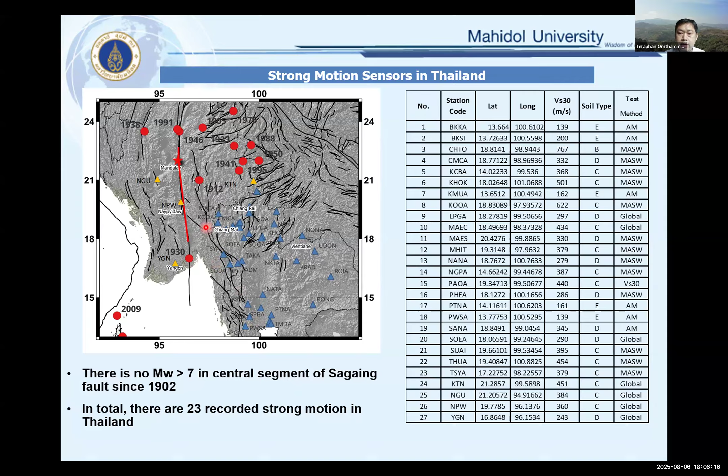Before that, I would like to go back a little bit to the history. This is the 1930 Bago earthquake that was felt intensely in Bangkok, and it was really close to Bangkok compared to the 2025 one. This is the description that people felt, and there were some minor cracks in 6 and 7-story buildings at that time, 95 years ago. The earthquake caused considerable alarm and people ran from their houses into the street. During that time, we didn't have tall buildings, and people could still feel this kind of shaking. So if you compare to MMI, it should be about 5.

There were also observations like an unbraked stationary motor car seen moving. So it's more or less the same as what we observed in March 2025 also. This means that this kind of earthquake happened in the past, and we observed it before, so it's not unusual that we can see it again.

In order to explain that, we need to understand the basin. This picture shows the topsoil in Bangkok. Later on, I'm going to show you some video that we have compiled. The first location is Sukhothai, located in the central part of Thailand. This is the video that we observed.

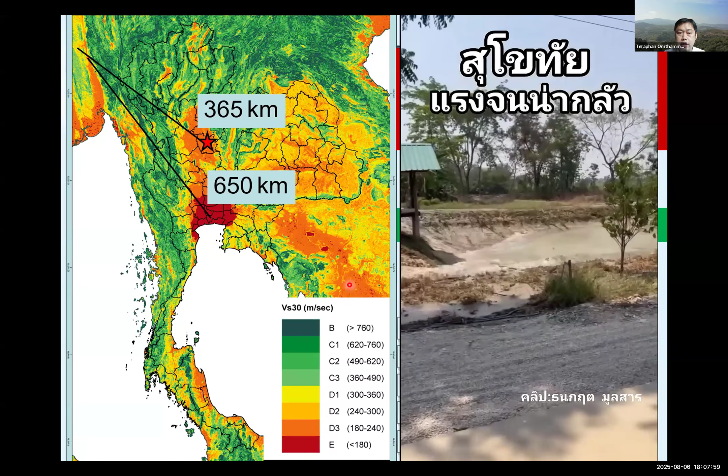This is sloshing of the water in the river. Due to the soft soil, and even though it's quite far away already, we still can observe this sloshing.

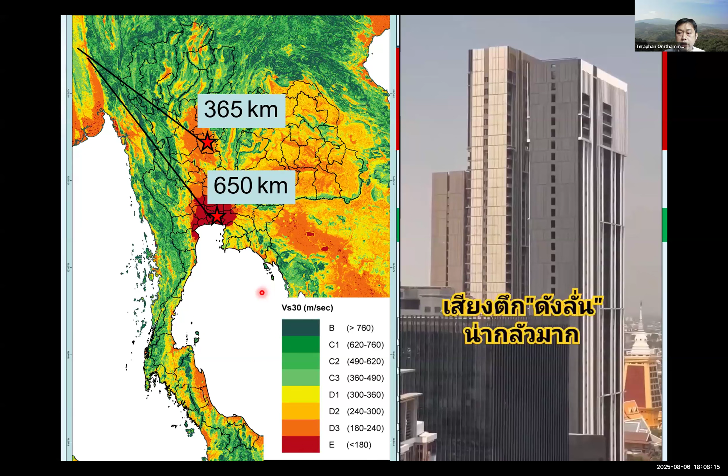Another video is from Bangkok. This is the vibration of a tall building due to the soft soil. So even though we are away from the seismic source, due to the soft soil, these effects can still be seen at about 365 kilometers and 650 kilometers distance.

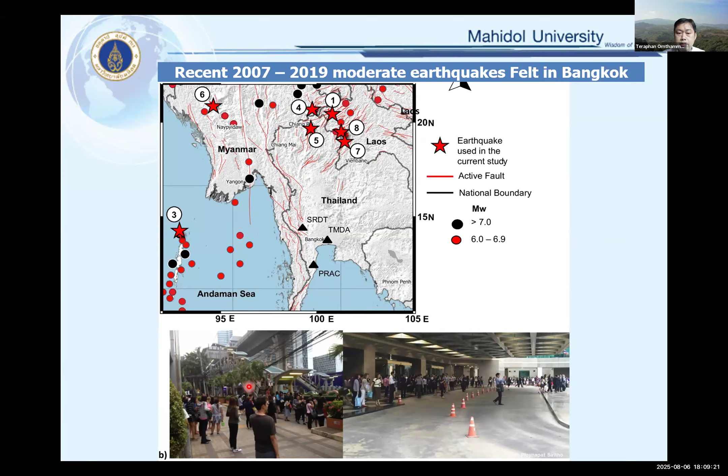Question then: in the past, did we observe this kind of shaking? People in high-rise buildings in Bangkok do feel this kind of vibration, but not like in 2025. This is the picture of people running down from the tall building. Mostly magnitude 6.5 earthquakes in Myanmar, Northern Thailand, Laos, or Andaman would cause shaking in tall buildings, and people would not feel comfortable, so they run down to the street of Bangkok. But the scale of the vibration isn't that large, though there's still a concern, so they run down from the street.

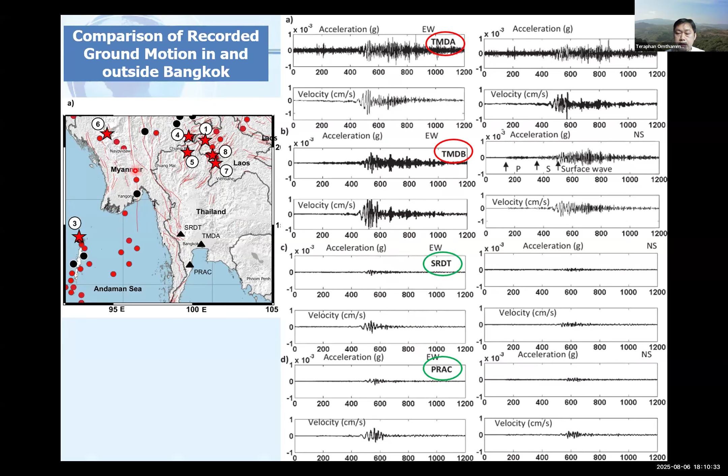We have expected this kind of event for some time, and we always said to people that there is a seismic gap inside Myanmar that we should be prepared for, and engineers should design for this kind of earthquake.

Coming back to the global context, the global seismic hazard map shows that even though in northern western Thailand the seismicity is not that high, we call it a moderate seismic region — for the 475-year return interval it's about 0.2 to 0.3 G on rock site for PGA. But for Bangkok, located away from active faults, the PGA at 475-year interval is lower, about 0.03 G on rock site. But this doesn't cover the soft soil effect, so the value seems quite low.

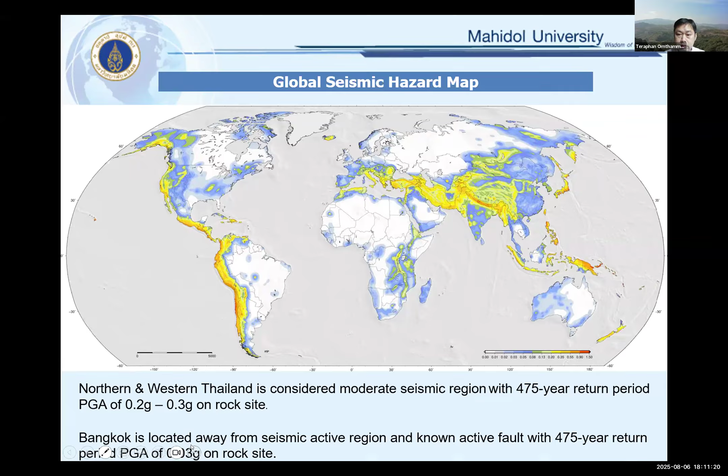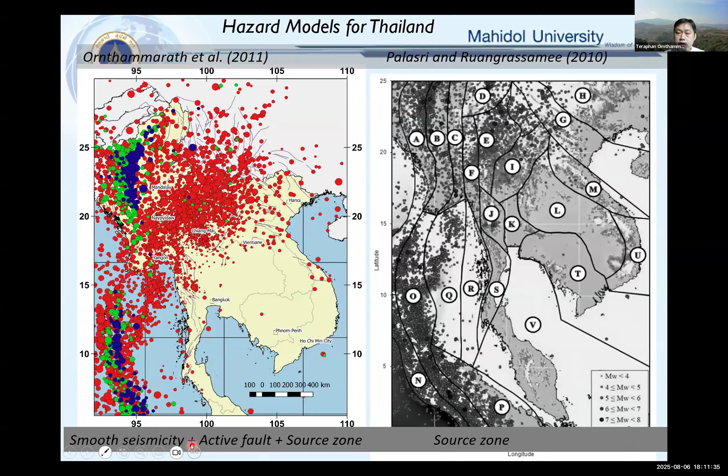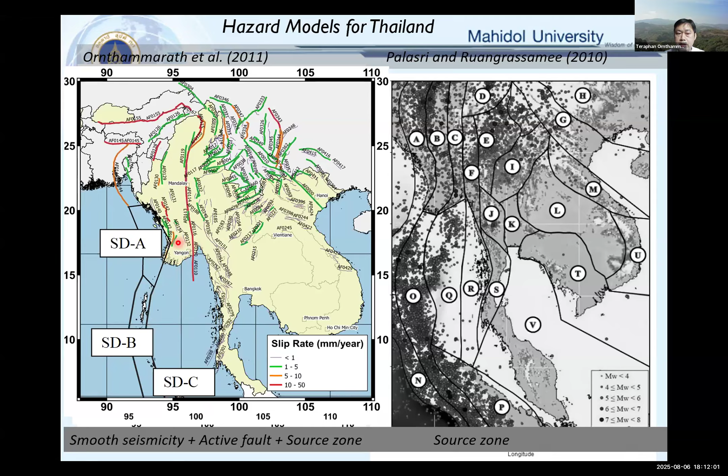In the National Seismic Hazard Model, we use two models, left and right. The left is smooth seismicity with active faults, and the right is active seismic zones. We classify different kinds of earthquakes inside and outside the country, and also consider active faults, as you can see on the left map. The red ones are the faults with high slip rate, which we already consider in our seismic hazard model for Thailand, along with the subduction zone here that has been quiet for some time.

For people that do not know about the seismic design code in Thailand, Dr. Pennung led the development of the seismic design code. We used the model of ASCE 7-05. It was first issued in 2009, and the latest update is in 2018. It is used throughout the country. The required value is the SA for 0.2 and 1 second for 2% probability of exceedance in 50 years. So this one we follow the ASCE as the standard.

For Bangkok itself, like I said, we have a lot of soft soil and the basin. So this is the Bangkok Basin Seismic Design Spectrum. You can see that it's quite unusual in the sense that normally you're going to see the high plateau at about 0.2 to 0.5 seconds, right? But for the Bangkok seismic design spectrum, because of the basin amplification, the peak goes to about 1 second.

So Bangkok is about zone 5, so it's about here, this line. It's quite unusual for the normal seismic design spectrum that the top goes until 1 second and then slowly goes down. So because Bangkok is away from the active fault, but we do have the soft soil, the amplification is going to be at the long structural period.

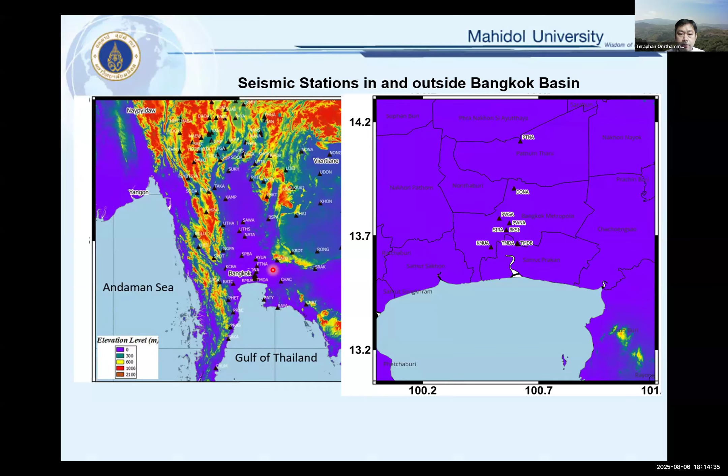And this is the seismic stations in Bangkok. Fortunately we have a lot of seismic stations that were able to record this event, but some stations unfortunately could not record it. Still we got a lot, like 5 stations out of this. And this map shows the elevation level from the ground. You can see that the central part of Bangkok is quite low, because a lot of the topsoil is located here.

So we are still trying to figure out the reason for the observation of the strong ground motion in Thailand, why it is always larger than the 1 sigma high. Maybe one of the things we need to check further is whether there is any directivity effect, because the rupture moved from Mandalay to Naypyidaw, and whether we can see this in the strong motion or not.

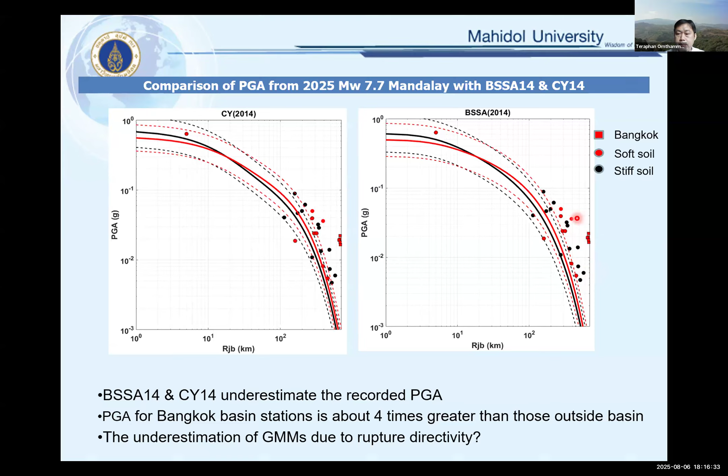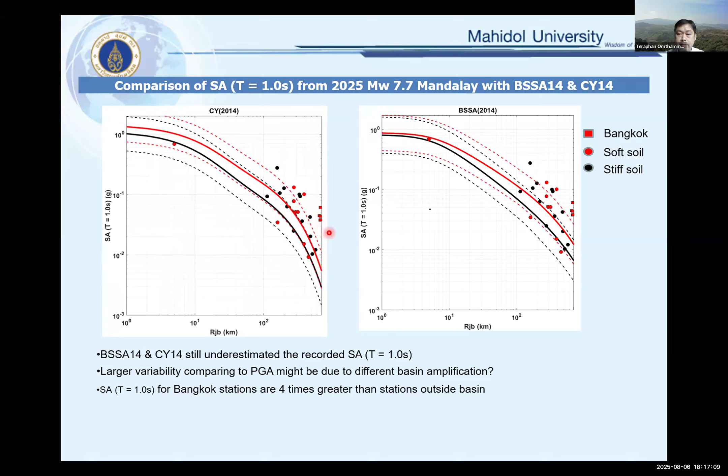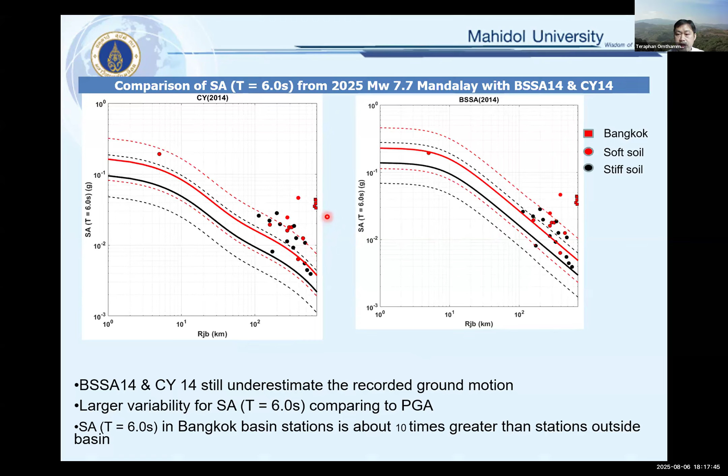When you see the previous figure that I just showed you, you might ask whether Thailand should use NGA-West2. In the past, in 2014, we had a moderate earthquake in northern Thailand, and we also did the same comparison, but we did not see much underestimation of the GMPE compared to the 2025 earthquake.

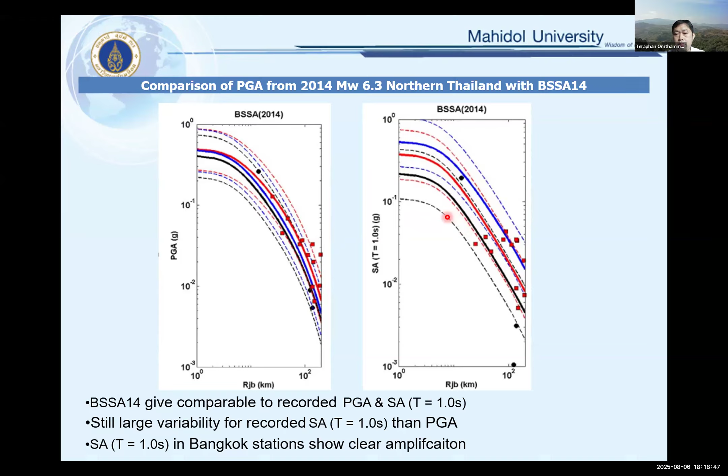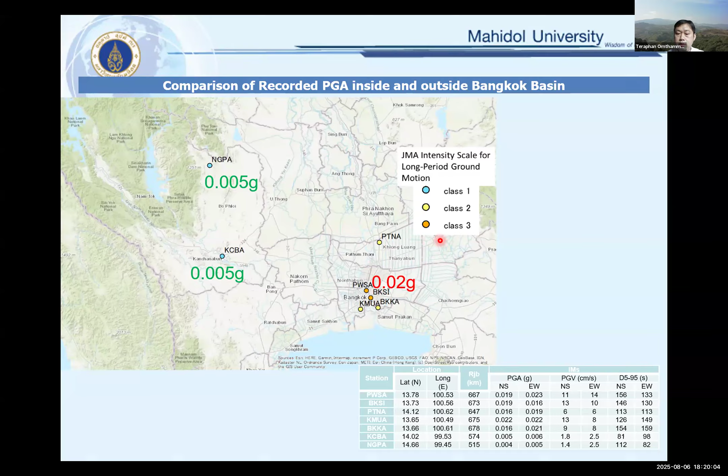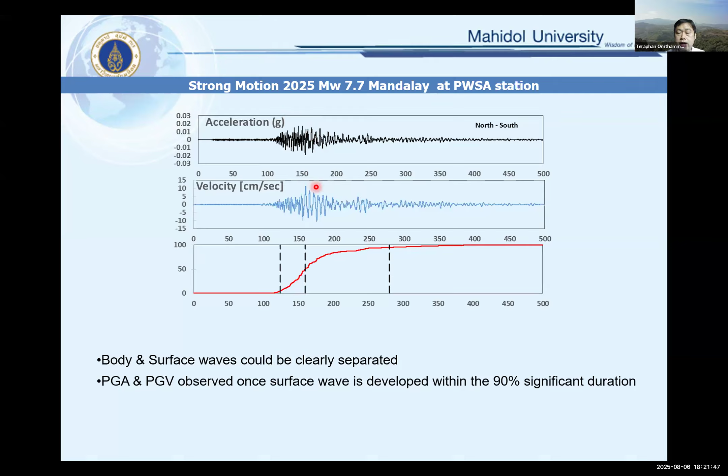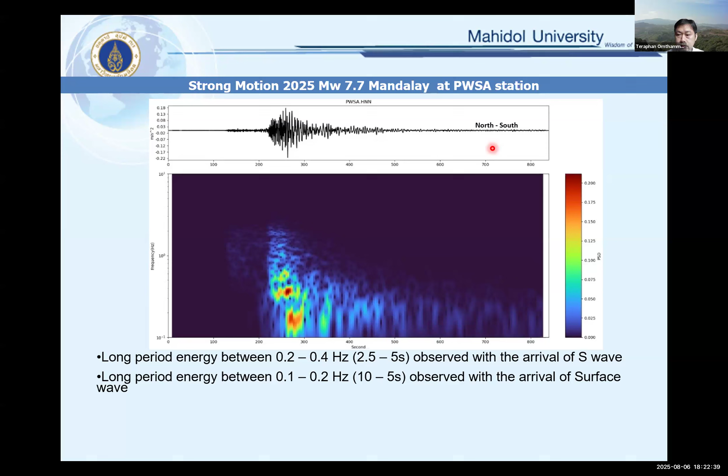If we do the same analysis for all three axes - north-south, east-west, and vertical - we can see that the long period energy is only seen in the horizontal direction, not in the vertical direction. So the surface wave moves quite large only in the horizontal direction, accounting for about 50% of the total energy observed in central Bangkok.

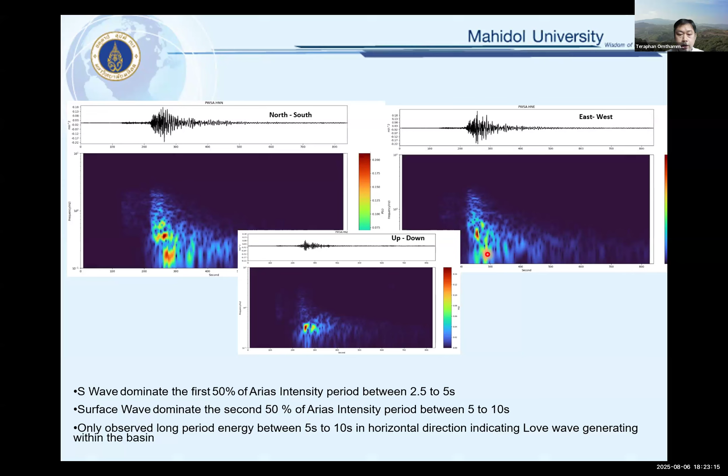If we consider this movement, it might be the Love wave, because the Love wave dominates in horizontal direction movement, whereas the Rayleigh wave would also have a moving pattern in the vertical direction. So that's what we consider might have happened in 2025.

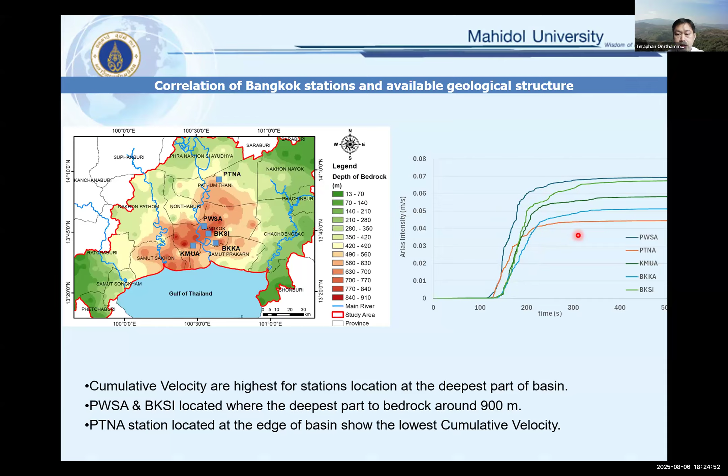From our ambient vibration measurements for tall buildings in Bangkok, for the 2 to 4 second range, that's about 20 to 50 story buildings. If the building has been built properly according to the seismic design code since 2009, the design values should still be okay. But for buildings around 6 seconds, which are very few, like maybe 80-story buildings, that's the one we need to think about updating our code for in the future.

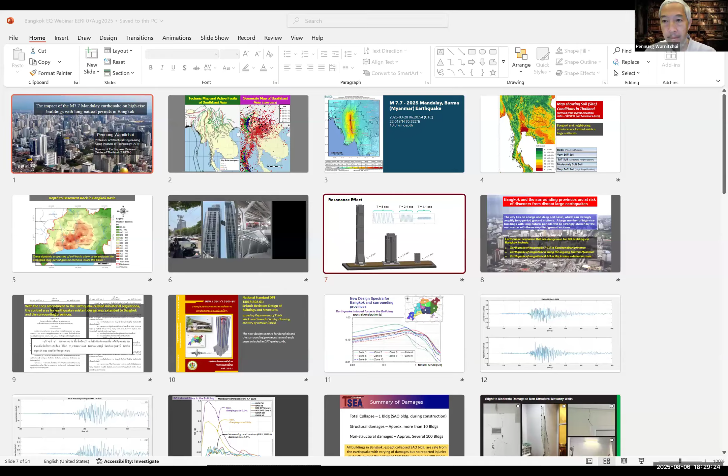Okay, let me share my slide. Can you see the first page of my slide? Yes, it's correct now. Okay, let me start my part.

I'm going to focus more on the impact of this earthquake on tall buildings in Bangkok. As you can see in this slide, there are a large number of tall buildings in Bangkok, the capital city of Thailand. We have more than 1,000 tall buildings, and many of them have been strongly shaken by the earthquake from Mandalay.

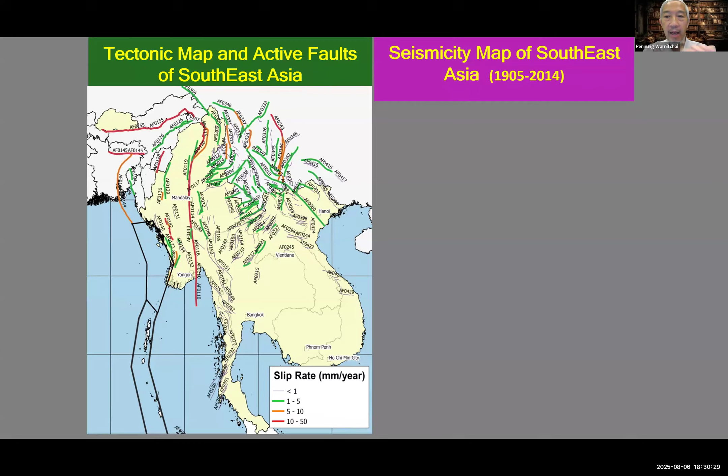Let me start by showing this one. Oh, okay, but this one I'm going to skip because Teraphan already showed the seismic activity of this region and active tectonic source. So let me move to the third slide.

This is about the Mandalay earthquake. The slide made from USGS shows that this large earthquake was created by a rupture along the Sagaing fault, a rupture over the section from Mandalay to Naypyidaw, producing a very large, strong earthquake. As you know, the ground shaking intensity is very high near the rupture zone, the red zone. But as the distance from the rupture zone increases, the ground shaking intensity reduces with increasing distance.

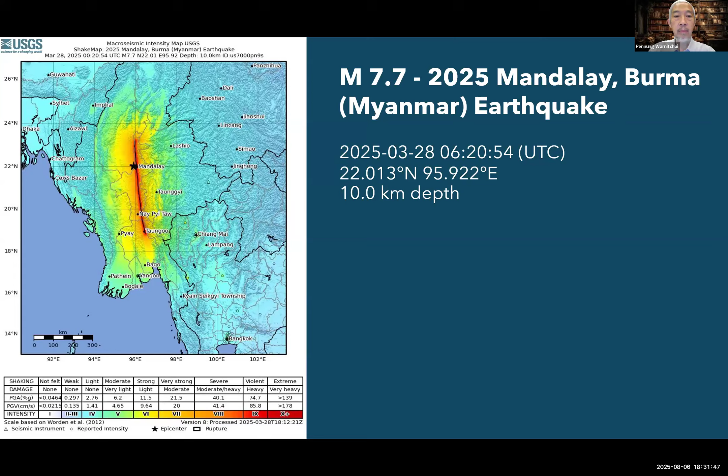Now, the main factor that makes the effect become strong is the presence of special geological conditions in Bangkok. I think Teraphan already showed this slide, but it shows that Bangkok is in a red zone. The red zone here means the top layer soil is very soft soil, with the VS30, or the average shear wave velocity over the top 30 meters, lower than 180 meters per second. So the red zone is in fact a large soil basin with the top layer soil being soft clay.

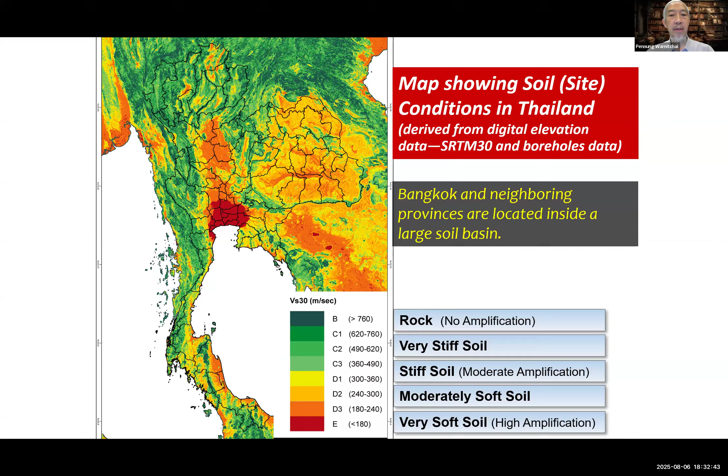Now, if we look at this picture, it will give more details about this red zone. It's in fact a large soil basin. The picture shows you the depth from the surface to the bedrock. The bedrock is defined as the layer with the shear wave velocity around 2 kilometers per second.

So this is a map showing the depth to the bedrock. In Bangkok, the depth is around 800 meters. And the basin is quite large. From the east to the west is around 200 kilometers. From the south to the north is around 150 kilometers. Many provinces are located within this basin, and the capital city is just at the center of the basin.

We actually spent many years, my research partners and myself, studying this basin. We use a technique called array microtremor measurement, which allows us to identify the shear wave velocity from the top layer down to the bedrock, over more than 1 kilometer. We took measurements at more than 180 sites and came up with a model for the soil basin, which allows us to conduct a proper site response analysis.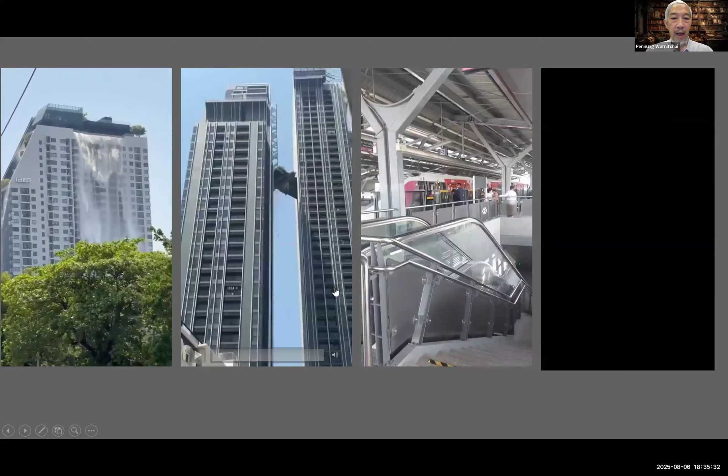And the next slide shows a large differential movement between the two towers, causing damage to the connecting bridge.

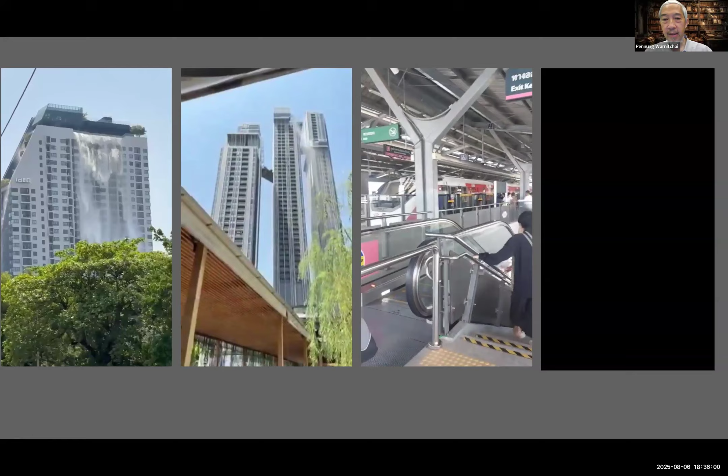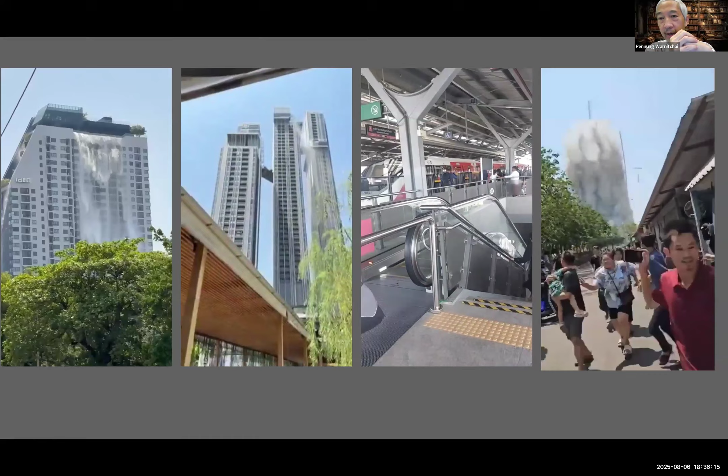The next video shows the impact to our SkyTrain mass transit system, rocking of its train vehicle. The last slide shows the impact to the state auditor office building under construction, and it was completely destroyed by the impact from an earthquake located 1,000 kilometers away.

In order to explain this issue more clearly, I made this kind of animation showing 3 different buildings. The one on the left is a very tall building with about 50 stories, and the natural period of its fundamental vibration mode is about 5 seconds. The second one is about 25 stories with a natural period of 2.4 seconds. The third one is about a 10-story building with a natural period of about 1.1 seconds.

Now, if the ground movement is a long period ground motion with a period matching the natural period of the tall one, it's going to produce a stronger effect on the tall one through what we call the resonance effect — the matching of the ground motion period with the natural period of the structure. But when the ground motion period changes to 2.4 seconds, matching the middle one, you have a stronger impact, again by resonance, but this time resonance with the middle structure. And then if the ground motion moves at a shorter period, 1.1 seconds, it's going to produce more impact on the shorter period structure.

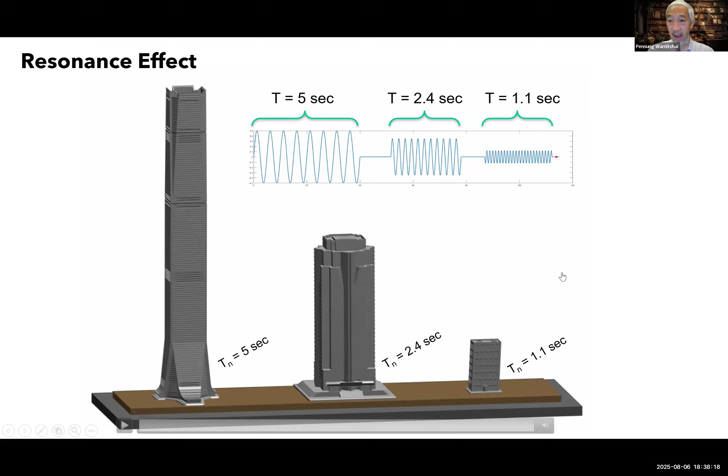When we combine our understanding about the Bangkok basin and the way it amplifies ground motion with our probabilistic seismic hazard assessment, considering many tectonic sources near and far from Bangkok, we arrive at a conclusion that Bangkok and surrounding provinces are at risk of disaster from distant large earthquakes.

We conduct a so-called seismic hazard de-aggregation analysis to identify the major earthquake scenarios that could produce a large impact to Bangkok, and we obtain about 3 main scenarios.

The first is an earthquake of magnitude about 7 to 7.5 on a crustal active fault in Kanchanaburi. The next is an earthquake of around magnitude 8 along the Sagaing Fault in Myanmar.

The second case is more or less the case that we had 4 months ago. The third one has not happened yet, but it may happen sometime soon in the future.

It's an earthquake of around magnitude 8.5 to 9 in the megathrust zone we call the Arakan megathrust zone, a subduction zone in the west of Myanmar. So all three of these could produce a strong effect on Bangkok.

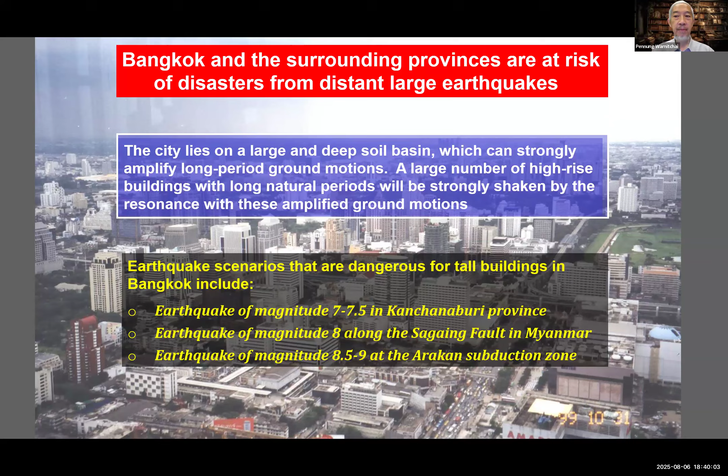We made this slide many years before the earthquake on 28 March, and we actually explained this to many people. In fact, Bangkok and surrounding provinces have been preparing for such an earthquake.

We introduced so-called ministerial regulations requiring all tall buildings to be designed for seismic resistance, since 2007. So that is the regulation.

We also developed a national standard for seismic resistant design of buildings and structures since 2009, and it has been revised in 2018, becoming effective in 2019.

So the regulation and code, we have had since around 2007 to 2009.

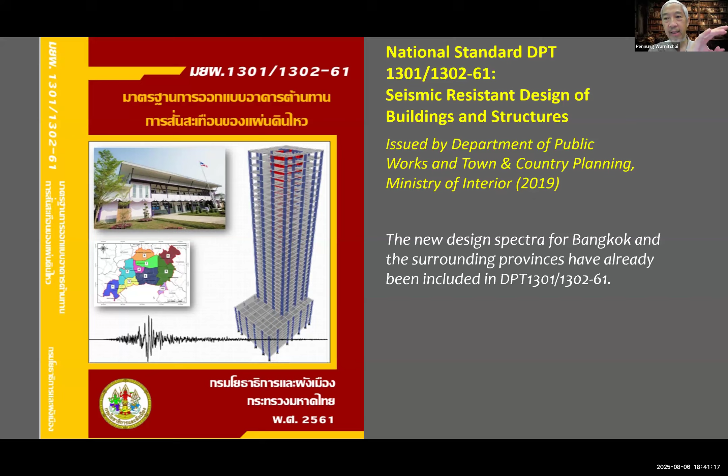In the latest version of our standard, I forgot to mention that we use ASCE 7 as a model code, so if you're familiar with US standards, you can easily understand ours.

For the Bangkok zone, we divide the whole basin into 10 different micro zones. Bangkok, the capital city, is in zone 5, and surrounding provinces are in other zones.

For each different zone, we have a design spectrum. This is similar to what you'd call the DBE spectrum, the design basis earthquake spectrum, which is set to be about 2/3 of the MCE spectrum, the maximum considered earthquake spectrum.

These spectra are made based on our seismic hazard assessment combined with our understanding of the soil basin. As Teraphan explained, the spectrum is not like a normal design spectrum you'd see in US code or other country codes, but it shows a rather high spectral acceleration in the long period range.

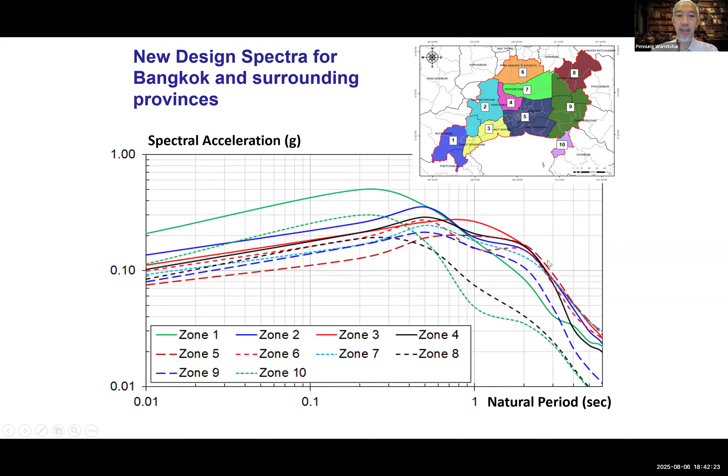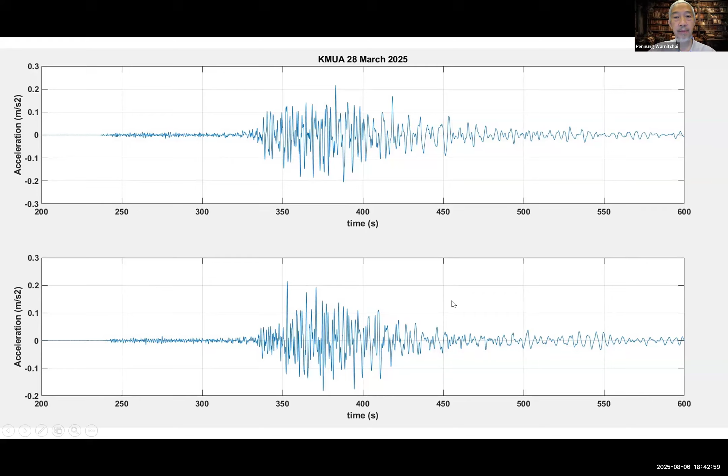Long duration, because it shakes for more than 2 minutes. The top plot is north-south, the one below is east-west. This is from a station, and we have about 5 stations.

The first thing we did after obtaining this ground motion was to compare its response spectrum with our design basis earthquake spectrum and MCE spectrum.

So it's quite lower in the relatively short to moderate period range, but in the long natural period range it's comparable to DBE, and in the longer period range it's even closer to MCE, sometimes exceeding it.

So this is comparing what just happened 4 months ago with our target spectrum that we use in design.

Based on this, we can expect that there might be some severe impact to our buildings, but we do not expect buildings to collapse if they properly follow our seismic design code and standard.

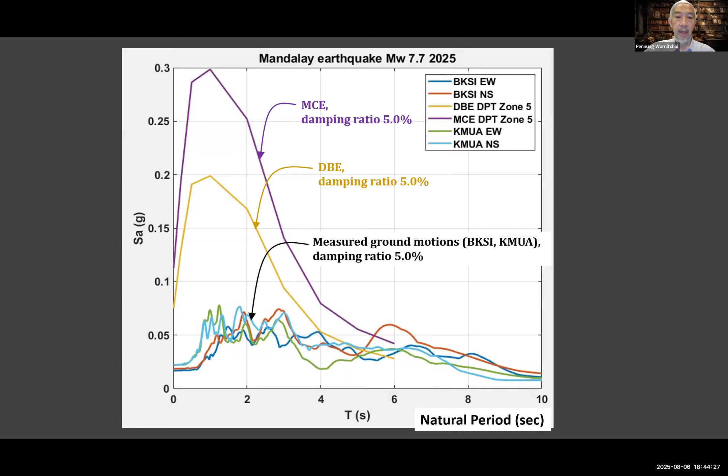This is a rough statistic of the damage compiled by the Thailand Structural Engineers Association. I just borrowed that slide to show you here.

They sent many volunteer engineers to check many tall buildings in Bangkok after the event, and found that several hundred tall buildings had damage to non-structural components like partition brick walls, ceilings, elevator systems, and many others. Although this doesn't affect the safety of the structure, it seriously affects the serviceability of these tall buildings.

About 10 buildings had damage to structural components, mostly to the reinforced concrete wall, or what we call shear wall or core wall. And the one building you've just seen collapsed is the SAO building.

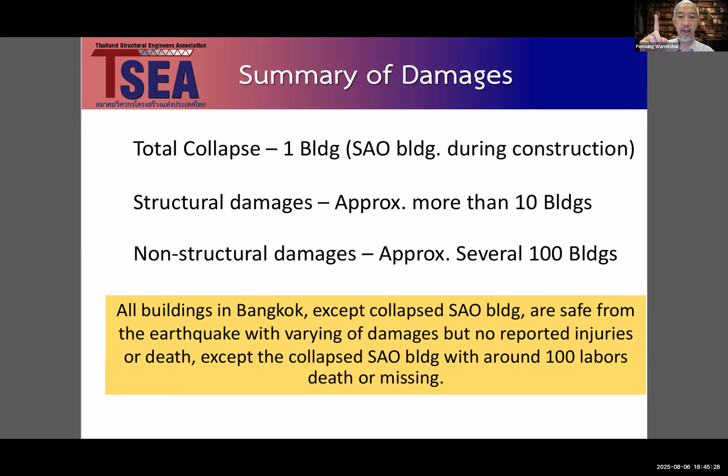Okay, let me show you some idea about the picture of damage. This is what we call slight to moderate damage to non-structural masonry walls. You can see clearly visible cracking, plaster damage to this building. These are the non-structural walls, masonry walls. But some have more severe damage that you can see through the wall. Of course, it's not easy to repair, you just have to demolish and make a new one.

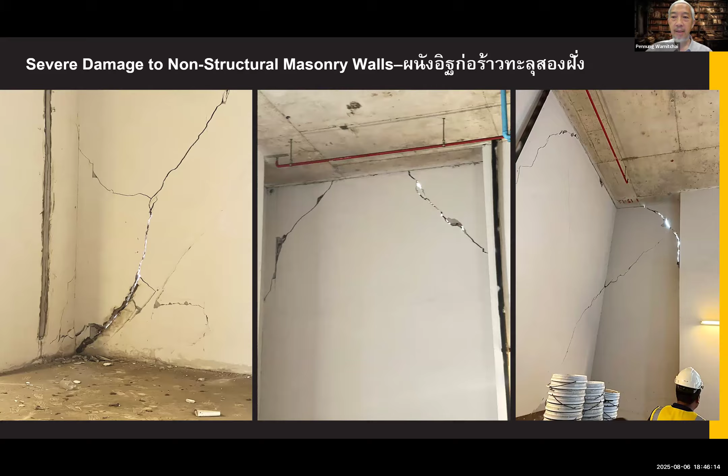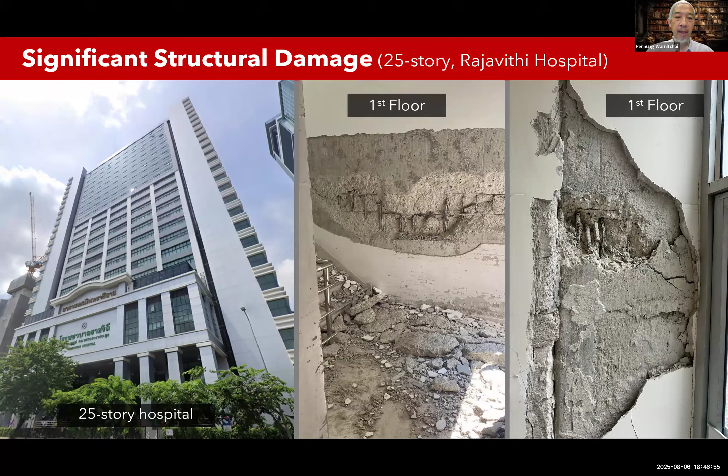In some buildings, around 10 of them, we found damage to the structural components. Like this one, a 25-story hospital building, you can see damage to reinforced concrete core wall. Concrete crush, reinforcement bar buckle. When we took a close look, we saw bad seismic detailing - they have lap splice on vertical rebar. I think that led to brittle form of damage for this building. Many buildings have damage like this.

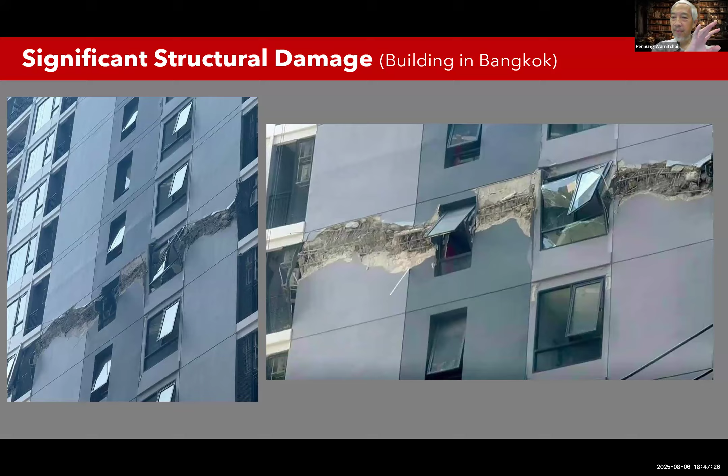And this is another one, damage to the shear wall. This is a 45-story building, and serious damage concentrated at floor level 9. It happened not just on one side, but all around. So this building is very close to collapsing, but it's still standing. They are now trying to repair this building.

Now, just to understand the big picture, the impact of this earthquake on tall buildings, we think that looking at the spectral acceleration alone may not help, because much of the damage may be associated with deformation demand. So we are trying to calculate this parameter we call roof drift ratio, delta by H. Delta is the top displacement at the roof, H is the height of the building.

We believe that roof drift ratio is a good index to relate to the observed structural damage. We first calculate spectral displacement, but that is the displacement of a lumped mass single degree of freedom system. So we convert that into top displacement of a distributed mass first mode vibration of the tall building by some factor. By doing so, we can compute roof drift ratio from available ground motion records in Bangkok.

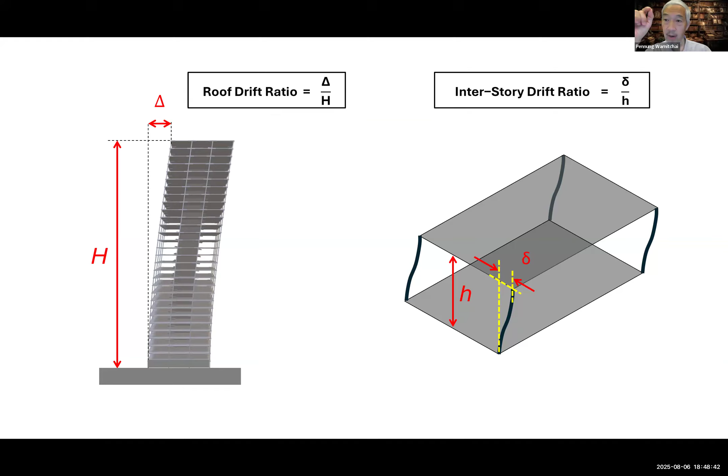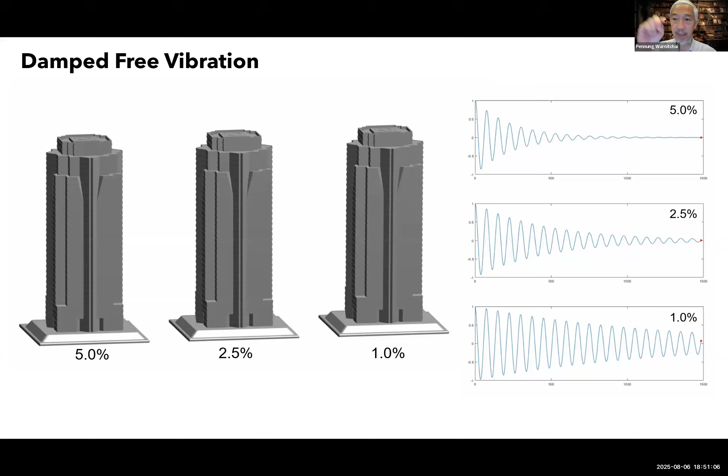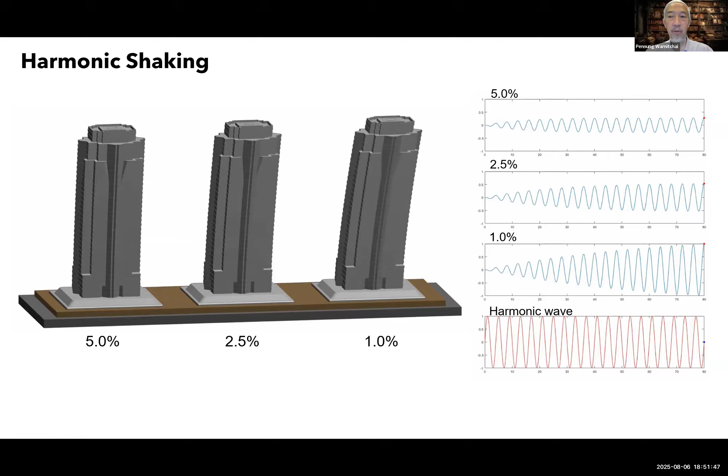I have no time to show the result, but if we have time later in questions I can show more information about this. Under effect of long duration ground shaking, long period, the structure with different damping ratio may have quite different levels of response because it's a resonant type effect. As you know, in resonance, damping plays a very important role. The building with low damping tends to have much higher response amplitude. So the response could be very sensitive to damping ratio.

In Bangkok, we have only about 10 super tall buildings with a natural period somewhere between 6 seconds or higher, so very few tall buildings above 5 seconds. We have more than 1,000 buildings with a natural period between 1 to 5 seconds, so most buildings are concentrated in that range.

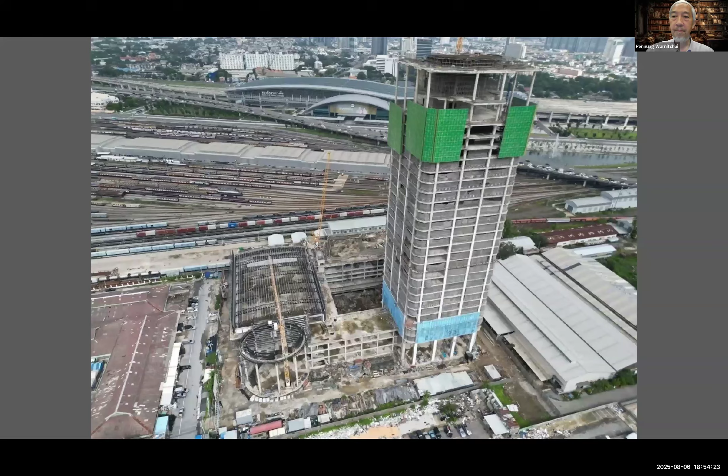I'm going to skip this, but this shows the SAO building. From our modeling analysis, it shows that the building has a natural period close to 3 seconds. I think that's one of the reasons why it was damaged, because it experienced very high site deformation demand.

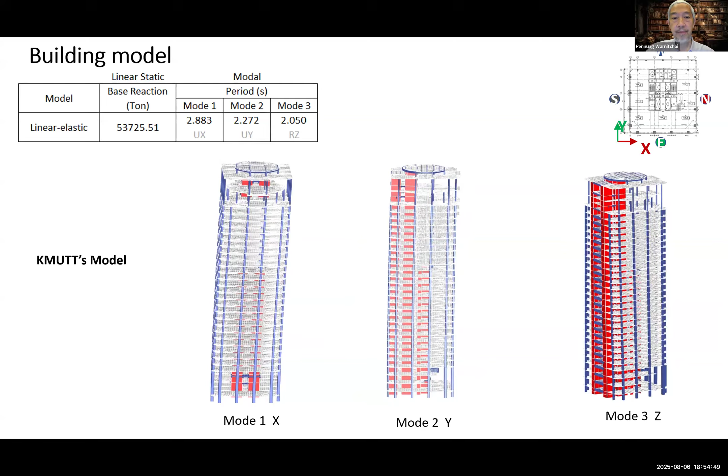So we should be able to handle a roof drift ratio larger than this. Now let's look at the typical structure we have in Bangkok, Thailand. These are typical tall buildings, basically made from reinforced concrete slab column frame designed to carry mainly gravity load, and we have reinforced concrete wall and core wall to resist lateral load, which are wind load and seismic load.

We use a lot of masonry infill wall, non-structural wall, and our buildings have typical irregular features: vertical irregularity, torsional irregularity, plan irregularity. So this is a typical structure.

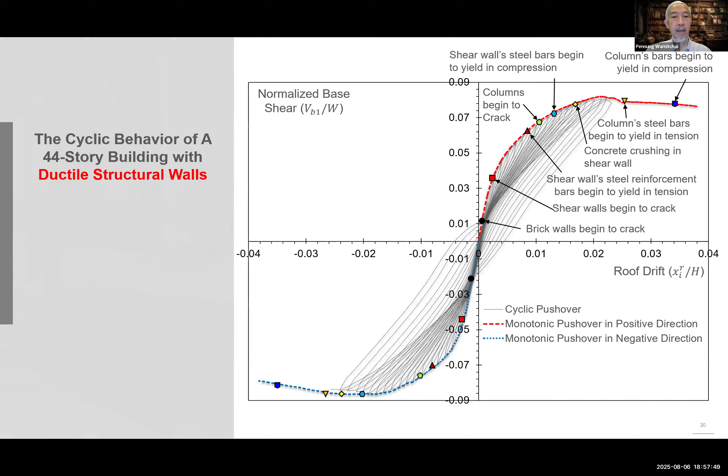Now, if we come back to see this - if we have our frame system combined with the ductile shear wall, I don't think we should worry much about this level of roof drift ratio. But the point is, I think this is not an issue that we emphasize in our standard. This is maybe the issue we need to focus on more in the future, to improve our design and ensure the safety of our tall buildings.

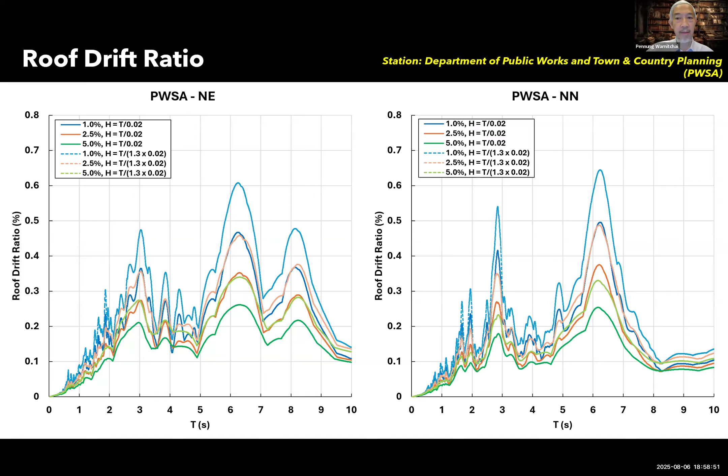This one shows the roof drift ratio using another ground motion record, this time in central Bangkok. You can see the peak at 3 seconds again in the north-south direction, but in the east-west direction, the peak happened at 6 and 8 seconds. So there's a variation in the ground motion characteristics in Bangkok.

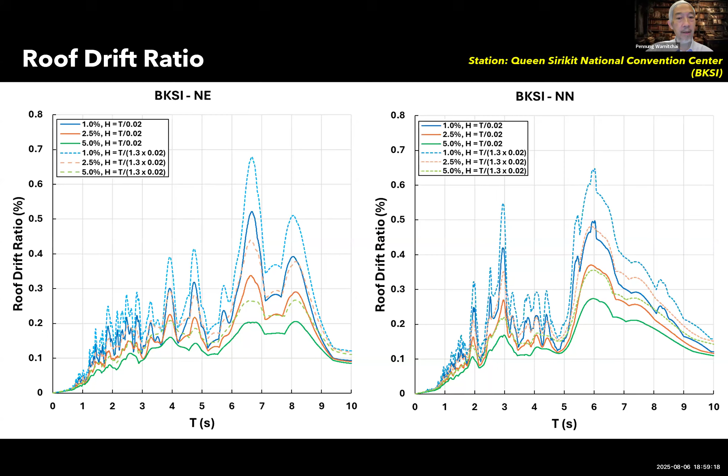This is another station showing 3 seconds, and again 3 seconds for this one.

But in Bangkok, we have not yet tried this, because it may be a new issue for Thailand. With this earthquake, we realized that we have a damping problem. Our buildings have damping much lower than we anticipated. To improve performance, increasing damping might be a good solution.

I think that's the end of my talk. I'm willing to answer any questions the floor may have. Thank you very much for your kind attention.

Thank you very much, Professor Warnitchai. That was a great talk.

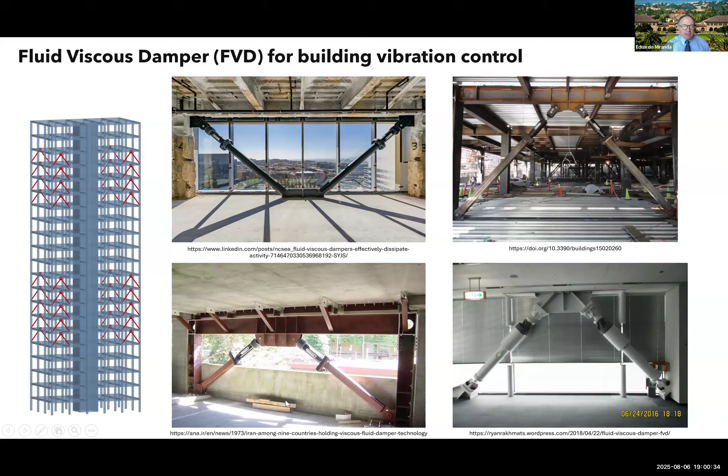Now I will just wrap up, adding a few short comments, perhaps with a little bit of a US perspective. As this earthquake illustrates, I would say, earthquakes sometimes play tricks on us.

I just want to highlight a few remarks. First, the length of the rupture, which, as you heard, is 480 kilometers. That's the distance from San Jose to downtown Los Angeles. If you were to take a flight, that would take about 45 minutes to get there. But this earthquake ruptured that length in about 80 seconds.

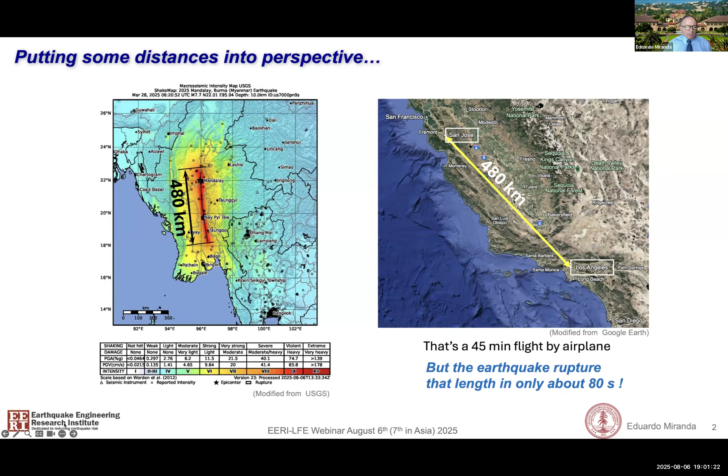And in terms of the distances, as you heard, the epicentral distance to Mandalay was about 1,000 kilometers from Bangkok. That's the distance from San Francisco to Seattle. Even if you take the shortest distance to the rupture, that would still be 650 kilometers, which is the distance from San Francisco to Irvine. So we're talking about very long distances that typically we would not be concerned about.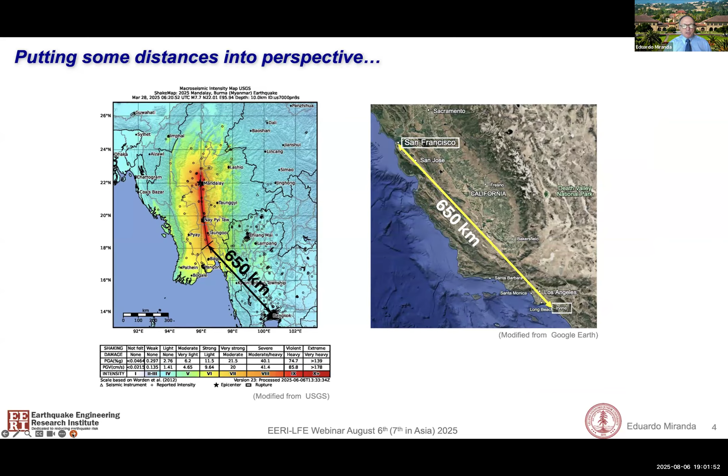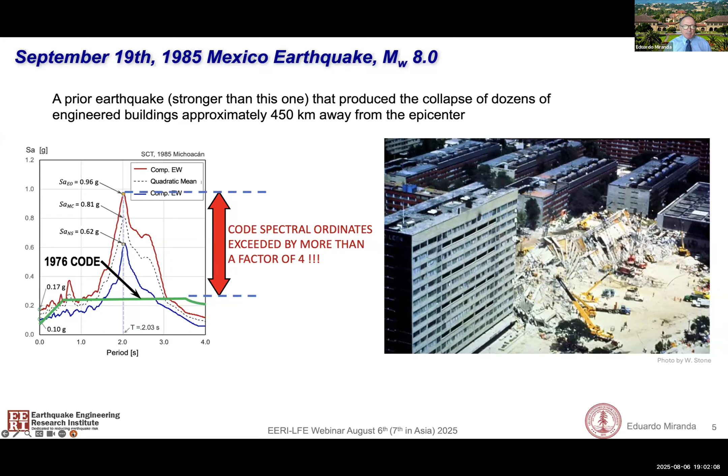Prior to this earthquake, the only other earthquake I'm aware of that produced collapses at very long distances was the 1985 Mexico earthquake, where there were collapses that occurred about 450 kilometers away from the epicenter. This is just one of the collapses that occurred there, and some of you may remember.

The other important aspect to keep in mind is why our guest, for many, many years, warned about the issue with large magnitude earthquakes: in addition to being very large, they have a very different frequency content than small and moderate magnitude earthquakes.

If we take the ratio of how the amplitudes of ground motion intensities increase with increasing magnitude, what engineering seismologists call the magnitude scaling, it's very different at short periods that affect low-rise buildings than at low frequencies, long periods that affect high-rise buildings. So it's very, very important.

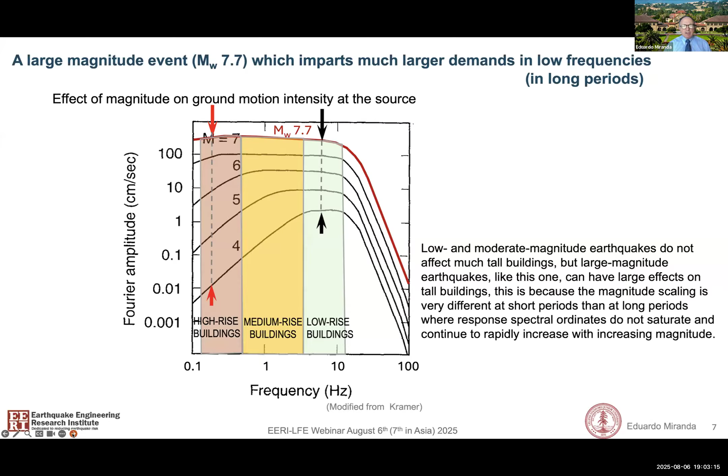But even though our guest had basically foreseen that this was going to be a problem, we saw that it was still not enough, and there were big surprises. They were well aware, as top experts on the site conditions of the Bangkok basin, and still, as you heard, even the most advanced ground motion models for crustal earthquakes underestimated the PGAs at Bangkok by more than a factor of 10.

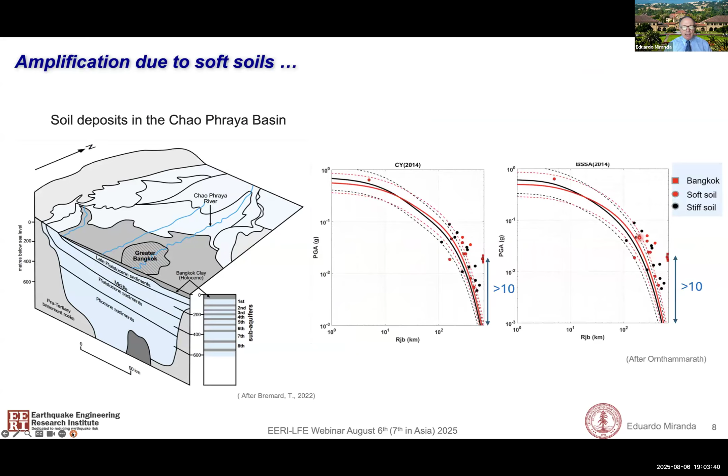These are some older studies done in collaboration between Thailand and some US researchers, like Scott Ashford, whom many of you may know. They published a number of papers warning about amplifications that could occur because of the soft soil. But as you heard, most of this was related to the top 12 to 18 meters with shear wave velocities lower than 100 meters per second, which produced large amplifications around 1 and 2 seconds. These were incorporated in recent revisions of the building code, but did not foresee these very large amplifications.

It's just a very recent paper by our speakers, published just 2 years ago, where they looked at horizontal to vertical spectral ratios using a number of ground motions. In those, they were able to see that there could be very large amplifications at long periods, such as 5 or 6 seconds. As I'm pointing with those two arrows, these amplifications are particularly large for earthquakes larger than or equal to magnitude 7.5.

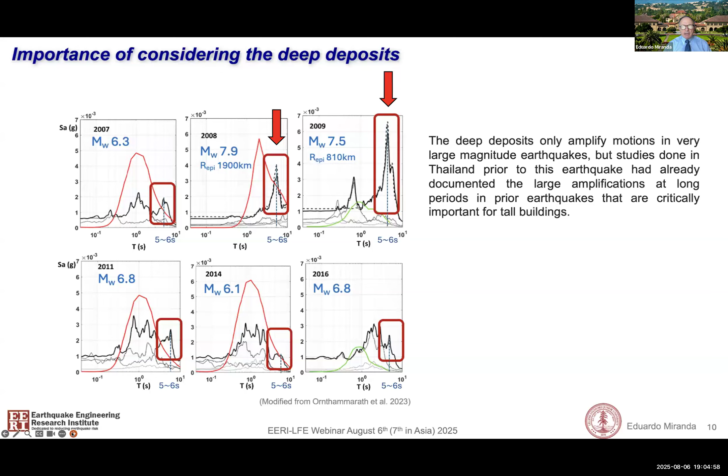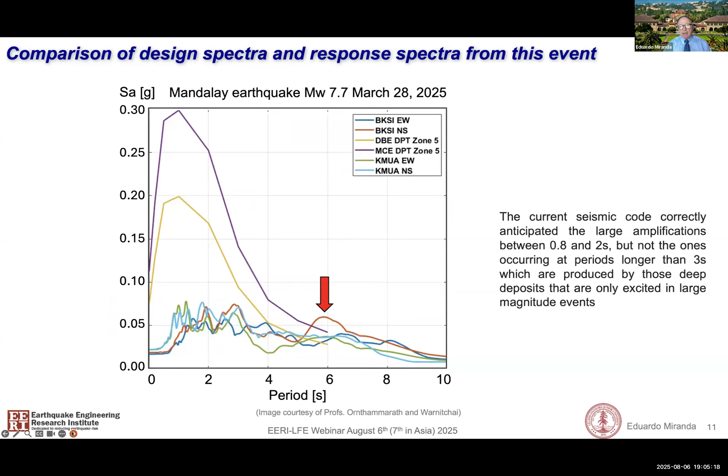This is basically one of the main reasons our speaker is just pointing out: these unusual but very large amplifications at very long periods that exceeded the ones in the code, even the ones in the MCE, as you see in this image.

This issue of damping that was mentioned is very important. As you know, damping in buildings tends to decrease as the building becomes more slender and taller, and in particular for buildings taller than 100 meters, they can have damping ratios lower than 2.5. This was incorporated in performance-based regulations here in California for the service level earthquake, but not for the MCE. This might need to be revised, and we really need to study this carefully, because these displacements and intensities that we saw exceeded the MCE level.

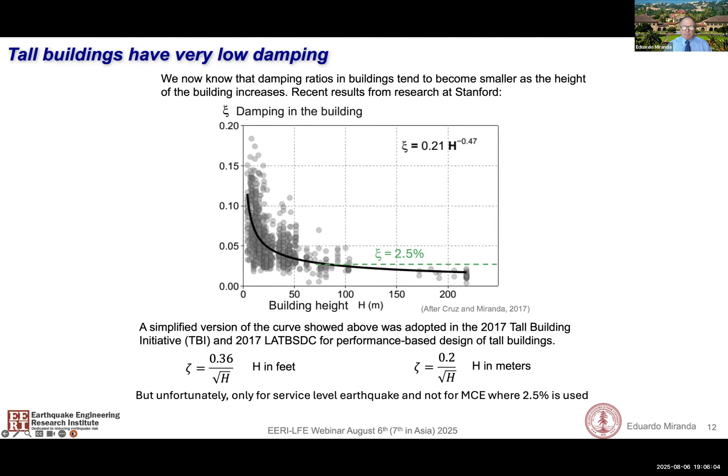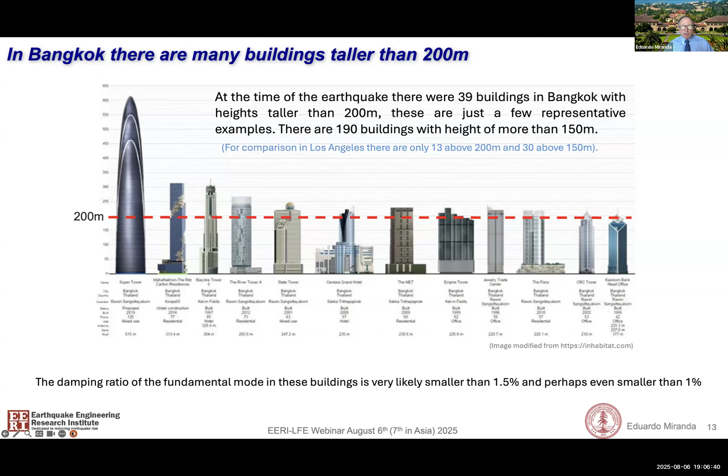As we also heard, there are many tall buildings. Here I'm just showing a few of them, but there are 39 buildings in Bangkok taller than 200 meters, and 190 buildings taller than 150 meters. For comparison, in Los Angeles there are only 13 taller than 200 and only 30 taller than 150. So the danger posed in Bangkok is much larger than what we have here in the United States, in Los Angeles, where we also have these deep deposits.

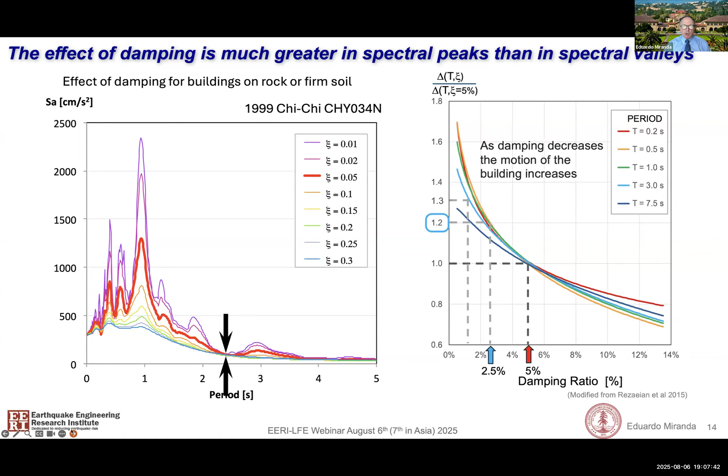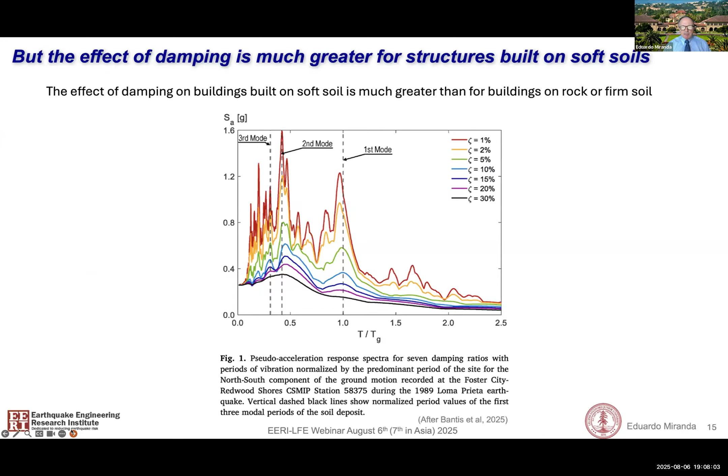But if you now look at what happens on very soft soils, this is one example from a station here in the Bay Area in Foster City, where you see very large peaks at the 3 modal periods of the soil deposits, where the effect of damping is much larger than in the spectral valleys. These are examples from the ground motions we just heard about, which they kindly shared with me.

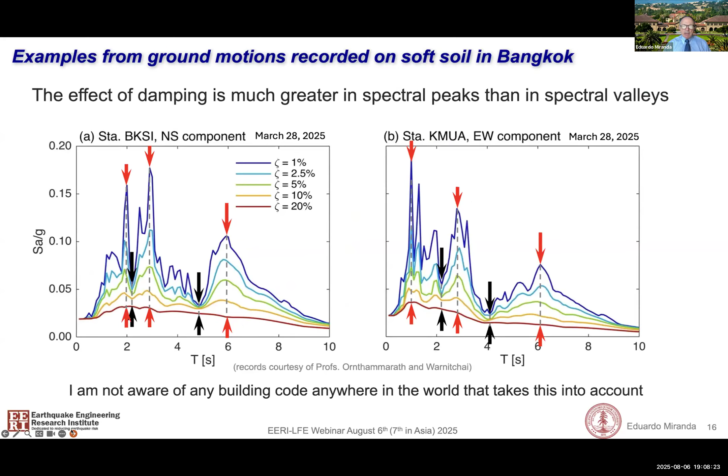I'm just showing you two of the components of these records. You can see with the red arrows that the effect of damping is much larger at some periods than at others, and I'm not aware of any building code anywhere in the world that takes this into account. It's only very recently that we developed here at Stanford some models that account for these differences in the effect of damping at structures built on soft soil.

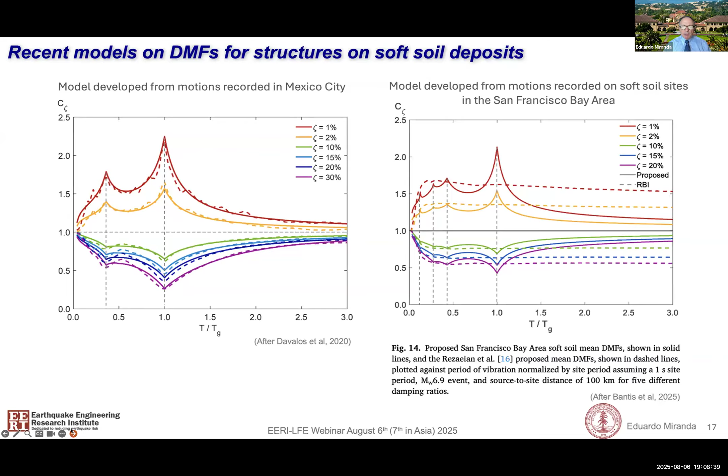With that, I want to say that this earthquake, like many others, provides an opportunity to continue learning from earthquakes, but this learning must not stay in papers, reports, or webinars—it needs to be incorporated to update our building codes and engineering practice, in order to translate this learning into actual risk reduction. With that, I want to wrap up, and we'll move to the Q&A.